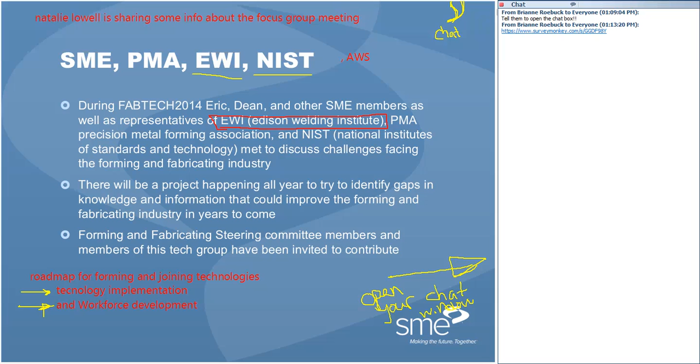Okay, thank you. The topic that I had floated out there today as a possible topic for the technical discussion, I just called it stamping fundamentals, and I wanted to talk about the stamping press line.

I didn't necessarily think there was a lot of new knowledge or new information I was going to bring regarding the stamping press line. What I wanted to do is open a discussion with you guys on the stamping press line, come to a common understanding of some terminology.

But use this discussion on the stamping press line to identify and recognize what are some technologies or information that all of us might benefit from if we were to expand or drill down a little deeper in regards to the stamping press line.

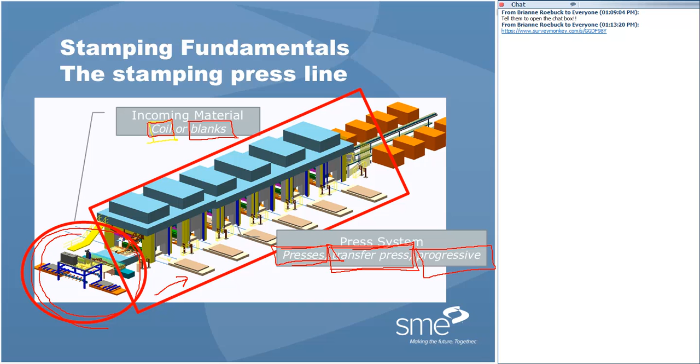So when we think about a press line, really it's some way of feeding material into either a single press or a system of presses where we are going to do some metal forming or material deformation. And when we think about that front-of-line system, I mentioned two different varieties.

Here I have a coil-fed system where the material is uncoiled off of the mandrel of the coil feed, is brought through a machine that is most likely straightening that material, as well as possibly cleaning that coil.

The material droops down into a slack pit and then back up into a feeder. This is the coil feed system.

Sometimes that coil feed system feeds directly into the manufacturing production line. Another possibility is that people have just a press that is blanking the material, cutting it into nice little trapezoids like shown in the bottom illustration. Maybe those trapezoids are stacked onto pallets, and pallets full of blanks are shipped to a manufacturing facility, and then those individual blanks are fed into the production.

I want to open up the discussion about production lines by thinking about what are some of the topics when we think of that front of line of the manufacturing facility, what are some of the mechanics we're concerned with, and what are some other manufacturing issues that build into how that affects our own manufacturing processes. So at this time, I'm going to unmute our microphones.

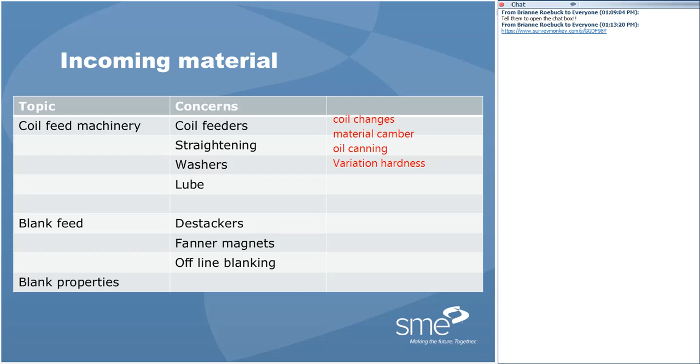Another one that connects in is different types of accumulators. You had a slack pit, which a lot of processes use, but there are also other types of accumulators, like accumulator silos that go the whole length of the building, up in the ceiling area. There's also an interesting thing called festoon rolls, which our company has dealt with replacement parts for before. So those are all types of accumulators for coil feeders.

That's a good point. In that last illustration I had an illustration of a slack loop pit. A lot of people have asked me what's the purpose of that loop pit. It's really to deal with the fact that if we're uncoiling a coil of material, this looks like a relatively small coil, maybe only 5 or 10 tons, but some large coils I've had to deal with in major body stamping are anywhere from 20 to 60 tons of coiled material.

Once you start unrolling that coil of material on the feed mandrel, we really prefer to keep that unrolling at a constant rate. But in the meantime, we have a press that's indexing the material incrementally. So we use this slack loop pit to allow us to continuously feed material at a constant rate off of the feed roller, accumulating a little slack inside the pit, so the incremental feeder pulls in exactly how much material it needs for that one stroke.

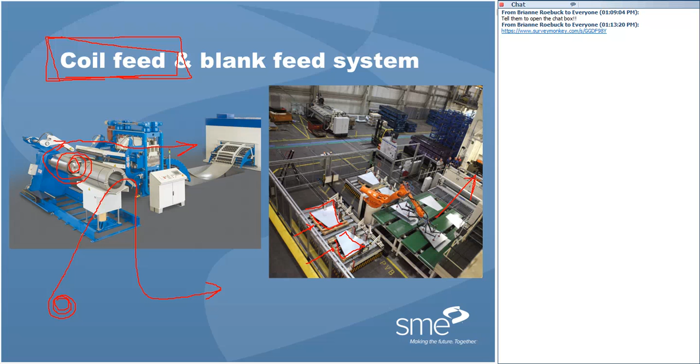And then feeding directly into that incremental feeder, just using the slack of the slightly loosened or unwrapped material around the coil in order to feed into that coil feeder. That's a great point to bring up - festooning, that's a great word. What other concerns do we have with that incoming material?

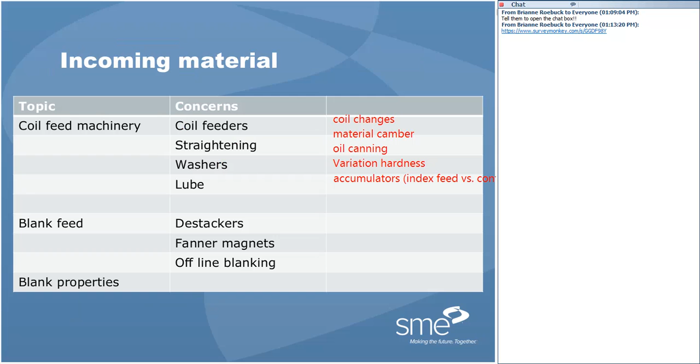We've mentioned a lot about coil feed. I had already made notes on my slides earlier about destackers and fanner magnets. Quite often, when you receive a stack of sheet steel, they'll use fanner magnets - magnets placed on the side of a stack of blanks - so that when we pick up one blank, the magnets hold the other blanks in place, fanning or separating the individual blanks so that the hydrostatic pressure of the lubrication doesn't cause us to pick up more than one blank at a time.

The reason I made that note this week is that Ford just won Truck of the Year for the 2015 F-150, which will have aluminum body panels. That's a problem, because when you stamp aluminum in large quantities, these fanner magnets no longer help you destack or unstack the material, so they have to find alternative methods to separate the individual blanks.

Another problem we always had with aluminum panels when stamping them was that they were so light that we often picked up 2 or 3 blanks at a time with the suction cups, and the hydrostatic pressure of the lubrication caused those blanks to cling together. We always had to figure out creative and inventive ways of separating individual blanks.

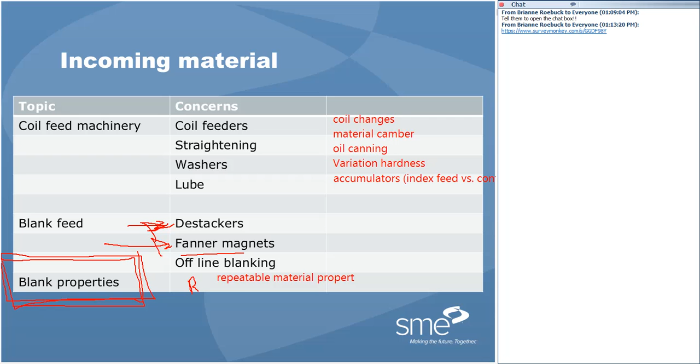One of the things we'll talk about more in February as we shift toward material properties and metal forming simulation is blank properties - how repeatable are the material properties, and material grades - are the materials in spec? That's always a concern when we talk about coil feed and blank feed: once we unroll the material or load it in, how do we know that's actually the material we ordered?

Some other things we can talk about regarding press systems are different press types. I uploaded a couple of videos - we'll see if those will play for us today.

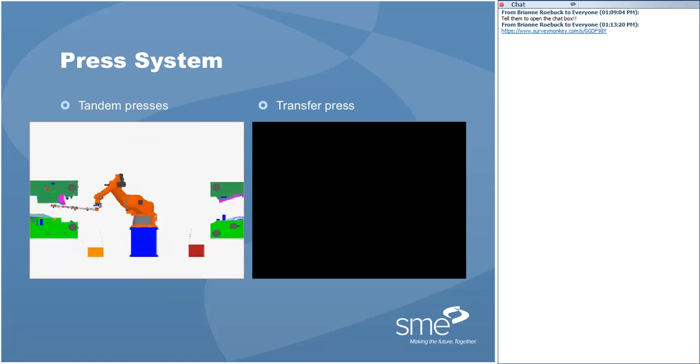The first video on the left is a tandem press. When you hear people talk about tandem presses, we're really talking about a system of individual presses - separate machines connected together with electronic controls so they operate as a system. In this tandem press system, I'm using a robot to move material from the initial forming operation on the left side of the screen, loading it into what might be a trimming or flanging operation on the right side.

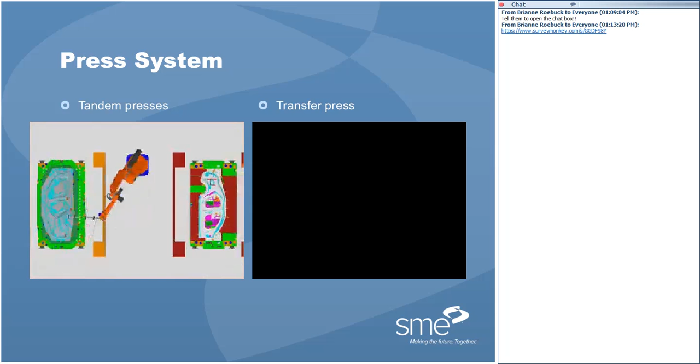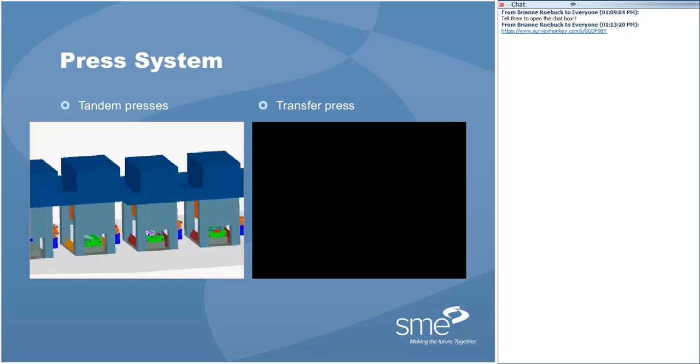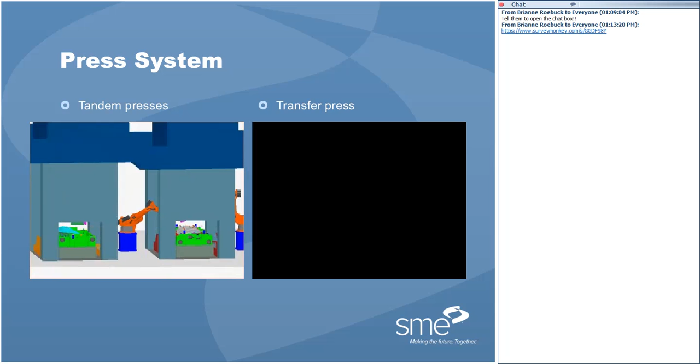So tandem presses are individual machines, each holding individual dies, completing separate stages of the forming operation. If we have 3 or 4 operations to form a part, it might be drawing, trimming, piercing, and flanging that part to form a body side panel. Here we're taking a formed part out of one die, and a robot picks up the part and shifts it to the next press. Those presses are just trained, through their electronic controls, to behave as a single system, but they are still individual presses.

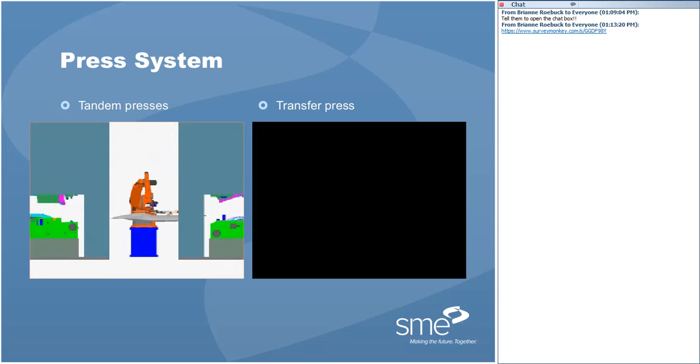It's a little different when people talk about a transfer press. A transfer press, instead of individual presses, is a large press that holds a system of dies. In this video, I'm showing a flat blank being loaded using press-mounted automation that we call a tri-axis transfer.

That tri-axis transfer system is moving the part into that series of dies, all contained inside the same stamping press. The difference between this video and the one I previously showed is that those tools going down and up are all being accomplished by a single mechanical device, a very large press. This one large press uses a large drive mechanism to move those rams or slides, which hold a system of dies. In this case, I have 4 individual dies attached to different rams inside that press, but they're really moving as a single system.

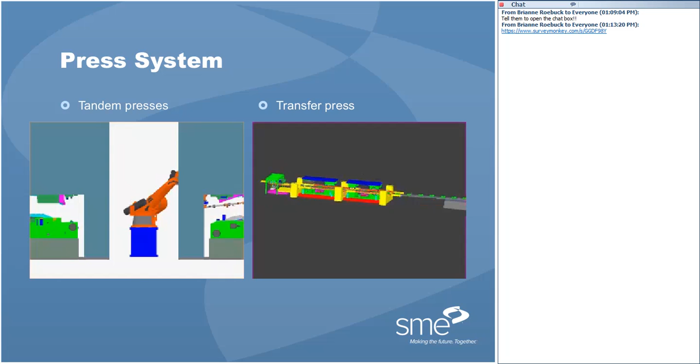With a transfer press, unlike the tandem press I showed on the left, rather than having individual robots in between the individual presses, we instead use a system of automation that is built in and synchronized to the press action, so we can very elegantly and easily transfer parts between the press opening and closing again. That would be a transfer press.

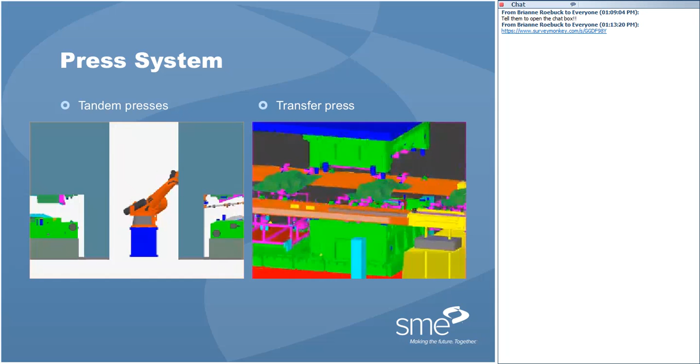Now, when we think about the press system, there's really just those two types of presses. They're either individual presses that hold one tool, or a special press that can hold an entire series of forming operations. We can talk about these press systems.

Besides just knowing that the presses are operating individually or possibly in a system, some people might also be concerned about the press's drive mechanism, press monitoring, or press automation. As a thought starter, I put together a table writing down different drive mechanisms - hydraulic, mechanical, and servo - and different things that can be monitored on a press. Press tonnage is, of course, a monitoring issue, and press safety is an electronics or monitoring issue.

And we can also talk about, the same way I showed in the video, relying on robots or a transfer mechanism. What are some other areas of technical innovation or technical sharing we can discuss regarding those individual press systems? I've unmuted all of your microphones, so please share with me your thoughts on press systems.

Now, stamping is out of my field, but on the monitoring side, aren't there systems available for in-press checking, for wear and breakage on detailed components within the die set?

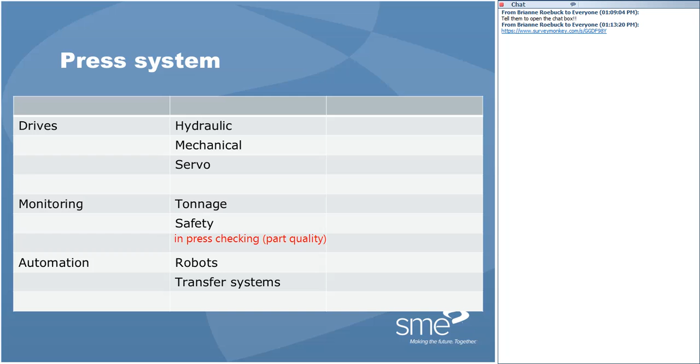And how about on the automation side, what other areas are of note? Sorry, Bob, I cut you off. You were saying? Yeah, I was going to say on the automation side, I think I've seen some articles where they talk about doing in-die tapping, or some kind of thread creation on the components as they're going through the process.

Yeah, we have automation in regards to in-die systems, like in-die assembly. Right, and those types of things like clinch die assembly. I believe I even saw once a transfer press - it was a transfer and a progressive press running side by side that would take the individual parts being stamped and then shuttle them together and fasten them to one another inside the press.

Greg mentioned that servo is a huge trend today in regards to the programming that can be done with them, because you get different stroke rates as well as stroke lengths, pressure application - these are all things people consider when choosing whether it's a hydraulic, mechanical, or servo drive system. It's quite often because they're concerned with force application, stroke lengths, stroke rates, or things you can do with hydraulic and servo systems, like dwelling at the bottom of the stroke.

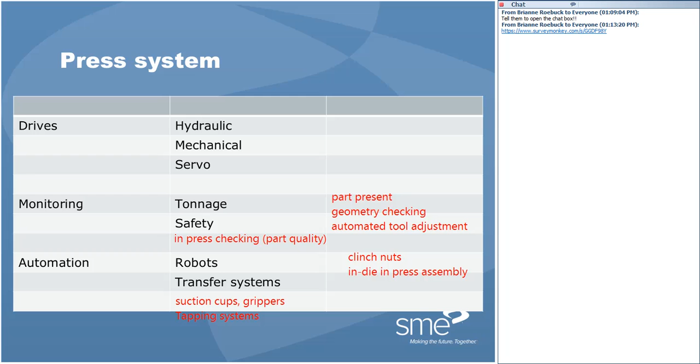Yes, and along with the drive, the general term would be retrofitting the current drive that you have, especially in lower budget manners. My dad is pretty interested in servo cushions themselves because he doesn't have the money to put into a brand new servo press, but the cushion can provide some of the benefits that would come with a servo press. And with some mechanical presses, you have to put in a hydraulic process to get the part to come off, to strip off the die, using really complicated geometry. So there are times where you're adding other things to your primary press drive.

That's a very good thing, right? You mentioned the press cushions, right? And there is this new servo valve controlled cushion versus the very traditional pneumatic cushions that we've had in the past. Some presses have hydraulic systems, some presses have hydraulic and pneumatic systems, air over oil systems, press-borne pressure systems that might be used for forming or for part stripping.

And Greg mentioned that one of the things that people like servo presses for is that servos are a bit more robust when it comes to this idea of snap-through or breakthrough tonnage, in a way that hydraulic presses and mechanical presses are a little bit less friendly.

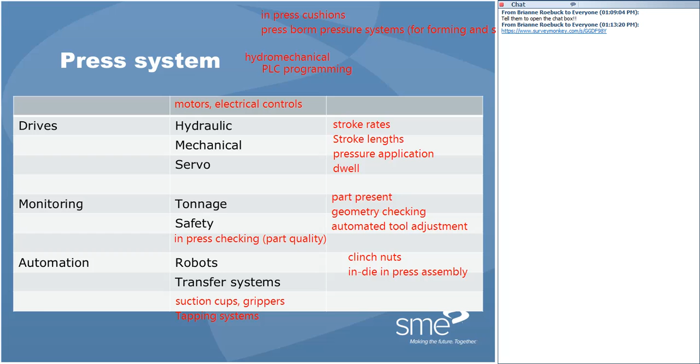Now, that's a little bit different than what you might think of when people talk about progressive die operations. Somebody, when I was showing the transfer press and the tandem press line earlier, might have thought to themselves, hey Eric, you didn't mention progressive presses. Well, progressive presses are kind of a misnomer, because a progressive press is really no different than any one of the individual presses that I've discussed today, or maybe a transfer press. It's just a mechanical, hydraulic, or servo-driven press with a frame, and inside that frame, the press drive is making a ram go down and up with portions of a die on it.

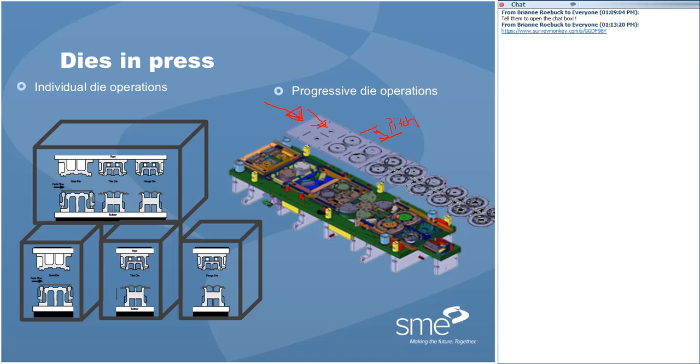It indexes that coil so that for every distance the coil travels, what we call a pitch, for every pitch of metal coil fed, a shape is formed — that's what we talk about when we discuss progressive dies.

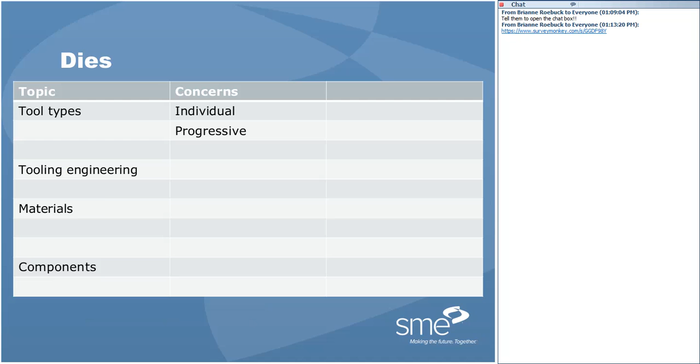So when we talk about dies, there are numerous concerns regarding the various tool types, whether individual tools or progressive tools, and many topics around tooling engineering, the material they're made of, and their individual die components. I'm going to unmute everyone's microphones again, and please share some of your observations or concerns when it comes to dies and die technology.

We're all quiet today. I think we lack a springboard because this is like the whole tool and die maker field. Well, dies — it's everything. There's so many things to talk about.

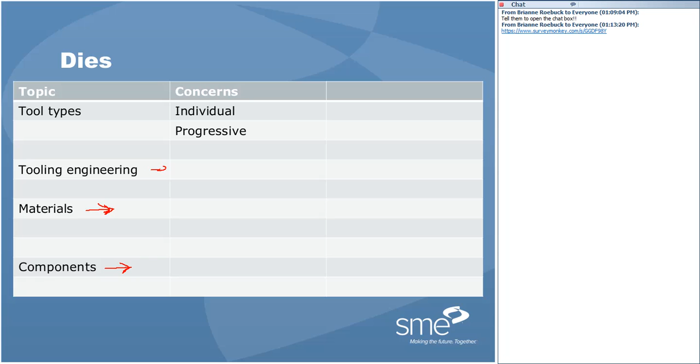Die changeover would be one of the things, when you're actually trying to set it up the first time in a press. I don't know where that goes under — I'm just writing it down randomly wherever it fits. So we can talk about die changeover, from one production run to another. But there's also die tryout, when you move to a new product — a whole new product.

We can talk about die validation of a new forming process. Greg mentioned this idea of SMED, the single-minute exchange of dies, or QDC, the quick die change, which we discussed as a topic last year.

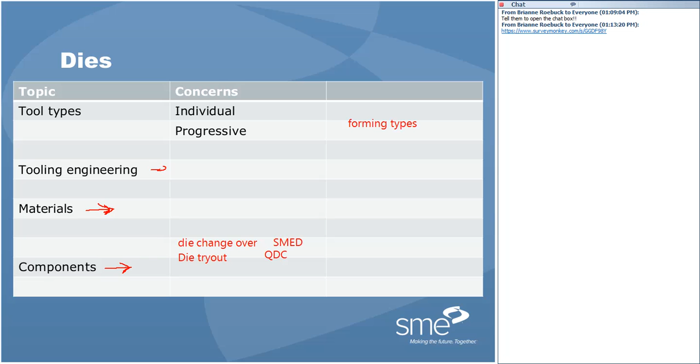Oh, I saw this — someone gave me a huge list of topics: design and engineering, material topics, tooling and sheet metal. There are different forming types when we talk about drawing, trimming, piercing, and flanging. But of course there are other forming methods like hydroforming, which I'm not discussing when I talk about die-based forming, because hydroforming can be done using bladders as opposed to mating male and female dies.

What are some other concerns regarding how dies operate inside the presses that might fuel the information you guys need, so we can go find guest speakers to talk about these topics?

Yeah, one of the things we've seen — there are a couple of parts we make where we actually work with the stamping house to create the blank form. But stripper type and stripper pressure determination, that's a big one for us. Right, so when you think about tooling engineering — stripper types, stripper pressures, or forming methods in general.

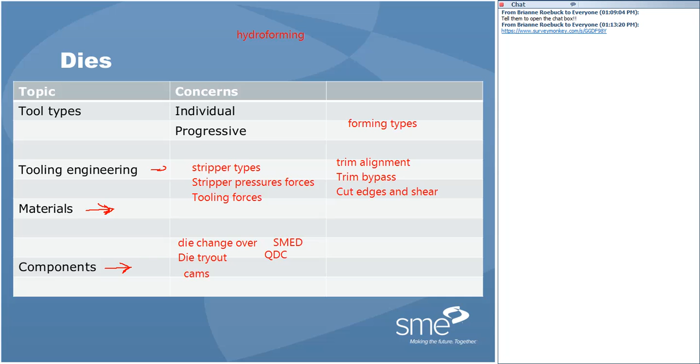But yeah, that does bring up a good point, right — tooling, manufacturing, wire EDM versus CNC machine.

That's another interesting topic - the technologies that affect forming and fabricating. Dean and I always talk about this, that just about every vertical inside SME affects sheet metal stamping, forming and fabricating in one way or another. There's no stamping without material removal and machining, because MMR is part of how we create the tools. Whether it's EDM or NC machining, we're seeing that 3D printing is starting to affect sheet metal stamping.

Our people print or manufacture tools themselves. Some of the other avenues, of course, are automation. There's automation interest inside SME, and automation is a huge part of moving parts through the stamping operation. It's quite possible that stamping, forming and fabricating is one of the most broad areas you could look at when it comes to manufacturing and manufacturing engineering.

What other concerns or things come to mind when we think about dies and die technology? Two that came to mind were maintenance work within tooling, and also the physical cam technology - especially if a die comes down but you need the force to come sideways or at an angle, not a straight up and down motion. Cams are one of the ways to change the direction of the force.

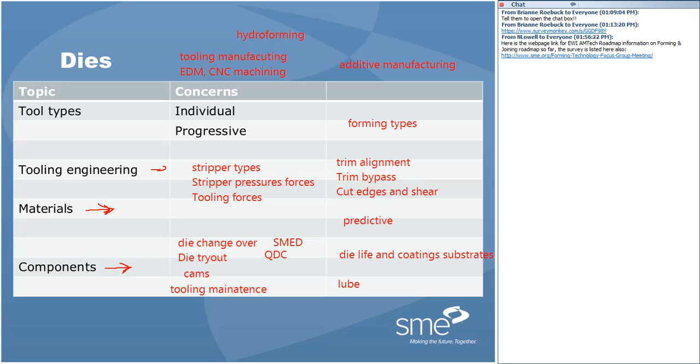Great feedback, everyone. That's kind of the end of what I was going to walk us through.

I want to mention one of the things we wanted to achieve. We fell short of our goal last year, and this year I want to re-energize everyone to think about this. I would really like it if this year we could achieve something as a group, and I know we were talking about this EWI road mapping project. One of the other things from today's discussion of the stamping press line reminded me that Brianne and her dad have donated this press to our group.

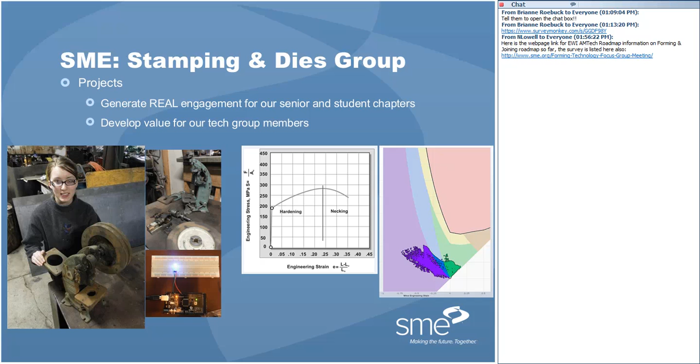That's Brianne in the picture on the left, and what she's standing in front of is a small benchtop press that her father and she are in the middle of refurbishing. They've taken the press apart, done some repairs on it, and I believe Brianne's dad was talking about hooking up a small motor to that press so we could have our own operational mechanical press. Brianne also was doing some project work last year.

She was trying to come up with a controls mechanism using a small programmable controller called an Arduino in order to control the press feed. One of the things we talked about was using this press as a technology test bed, but also as a technology proof of concept - for any group to look at its controls and press improvements.

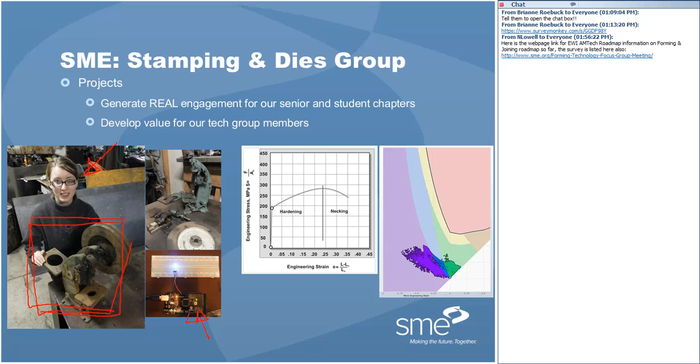You might have to attempt to say that one more time, you broke up a lot during that statement. Yeah, somebody was standing outside my door stacking cups and glasses.

The idea was, one thing we want to achieve is create a working model press line using that press that Brianne did. And we've been talking about shipping that press to the various SME or PMA events that we participate in.

Using that press as an opportunity to educate our members and increase interest in this very broad technical field of sheet metal stamping, and let people know there's a lot of technology and innovation in press feed, press controls, press drives, safety, as well as the computer technology required for tooling, tool design, and automation.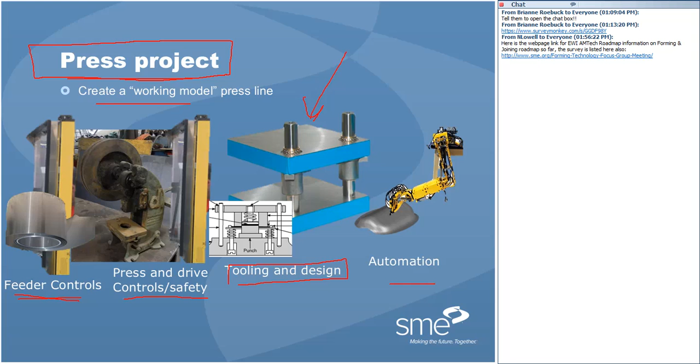The other goal I have this year for the Stamping and Dies Tech Group, in conjunction with the Metal Forming Simulation Tech Group, is that there's really no well-defined standard in the industry for how one should perform a metal forming simulation. I was hoping to drive our conversations and drive the technical group into documenting some best practices when it comes to performing metal forming simulation.

I'm hoping we encourage all of us to curate and host a materials properties library, or expand the SME wiki so it could contain up-to-date information regarding material properties, types, and grades. I was also hoping to host a materials information exchange so that SME members participating in the metal forming simulation activity could find peers in the industry who might already have information about the materials they're forming.

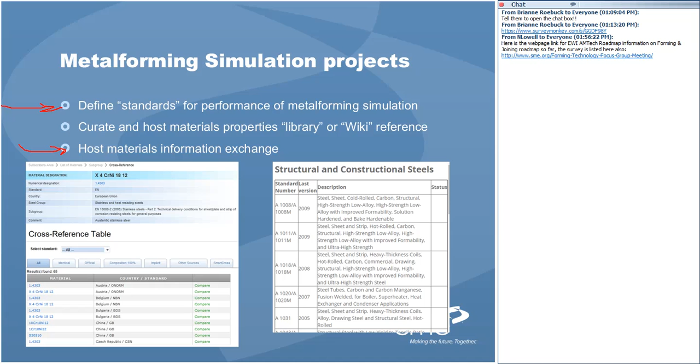And what other things could we do as a technical group that would make this group valuable for you? Just those ideas—think about that this week, okay?

One of the things I'd really like to do is hear from all of you after these meetings, and hopefully something we talked about—the materials exchange—could it happen in person?

What do you mean by that, Natalie? Is that a virtual event, or something you do online, or is it something you can do at an event? Thinking the materials exchange would...

Yeah, by materials exchange, what I meant was materials data or information exchange. So that would be a virtual event or a virtual marketplace where if somebody said, I need a material model for this DP 560 material, I might be able to share some information I had about that material.

Okay, a Craigslist of data? Exactly, exactly. Quite often many of my customers are testing materials they're running in their production environment so they can get good material models, and in the meantime they have to spend extra money to run the test every single time. But possibly some of their colleagues and peers could benefit from the material tests they've done, and they could share information as well. We're all better engineers when we have more information.